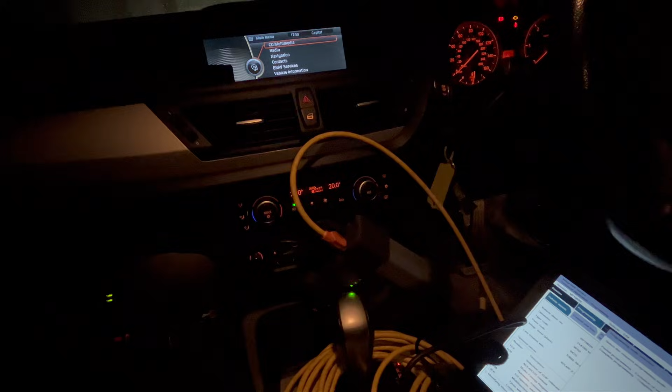So we're using ISTA/P Genuine to do a full update. I'll get everything connected up and show you the connections, and we'll go from there. It's quite late and quite dark, so I'll go through this very quickly.

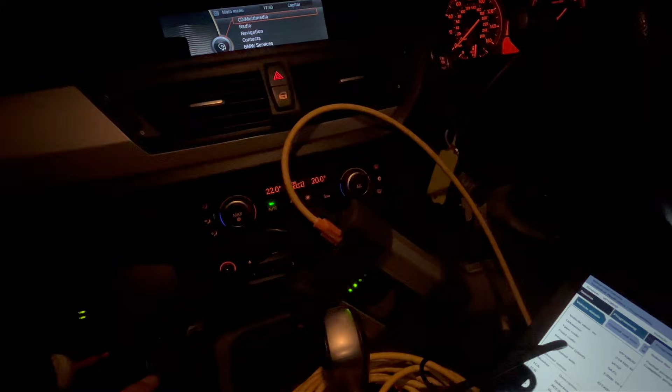Got the genuine ICOM connected, obviously, to the OBD port. Now on these E series cars, you have to also be connected to the MOST port. So on this E84, it's very similar to the E90s or the 3 Series. The MOST port connector is just under the glove box on UK cars, and under the driver's seat on American cars, or left-hand drive cars.

But you can see here there's a little tab that you pull down and you can connect the ICOM B straight to it. Apologies, you probably can't see it because it's dark, but basically that's the connector on the floor. We unplug that and we plug our ICOM B in.

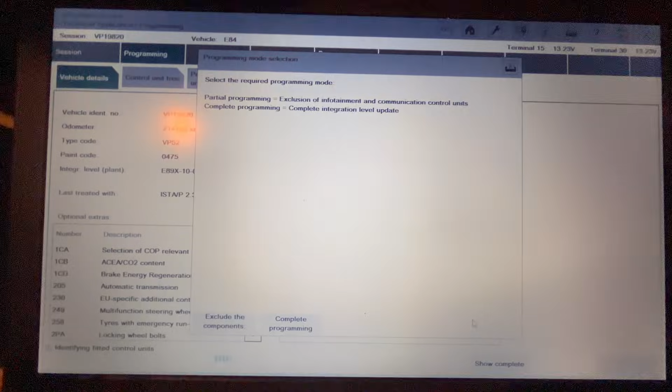Once ISTA/P is all loaded, it'll ask you basically what you want: partial programming, which is without the head unit side of things, or complete programming, which is everything basically. So the partial programming will just exclude all of the infotainment and communication control units, but what we're going to do is a complete integration level update. So we'll do complete programming.

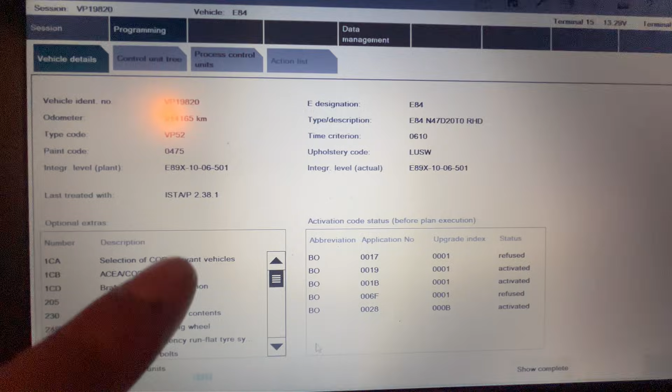All the vehicle information is here. It gives you the option codes and everything like that, all the activation codes that are on there, and also here is what we're looking at.

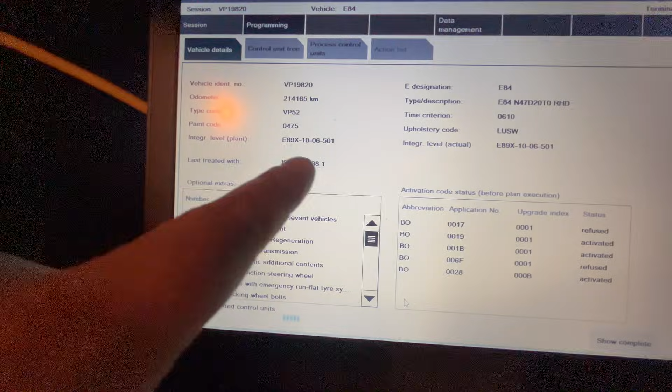So from plant, basically that means from factory, it was 10.06501. The actual one that is reading from the car is 10.06501. So this actually hasn't been updated since it came out of the factory. So there'll be a lot of updates to do on this. Engine, gearbox, head unit, climate control, every single module basically in the car will probably need an update at some point, or will need an update.

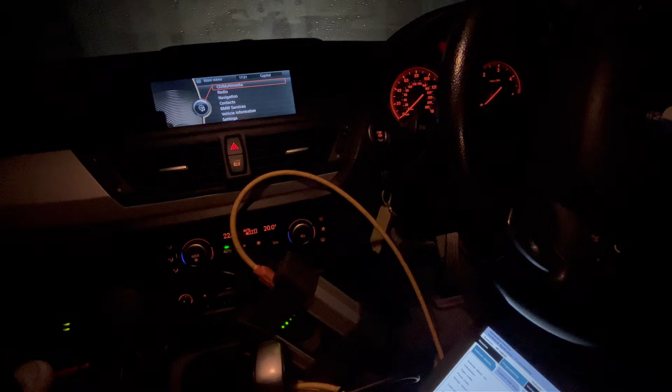So cluster, everything will be updated up to the current level, which it will show us, and I'll show you once it gets us to that. So it's just doing its bits, trying to determine what updates are needed. Once that's done, we'll get back onto it and show you what is happening.

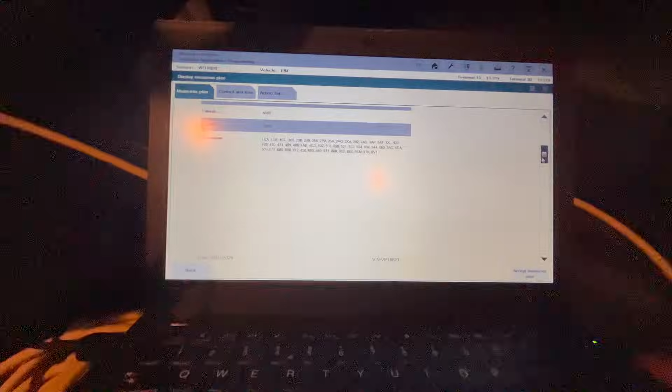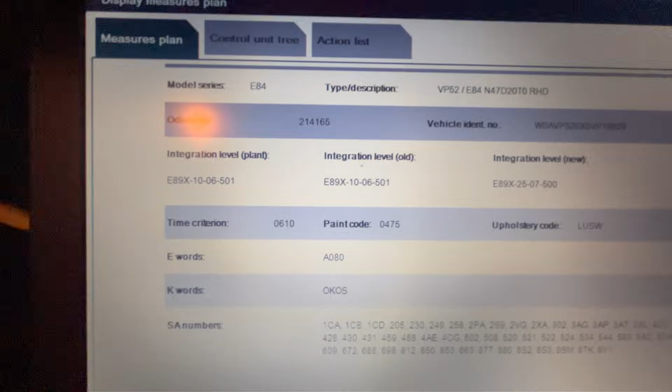So what it's done here is it's created the measures plan. It tells us all the vehicle information there. You can see integration level old will be 10.06501, which is what it currently is, and then it's going to be the new one, 25.07500. So a big update, and the programs, or units it's going to actually program.

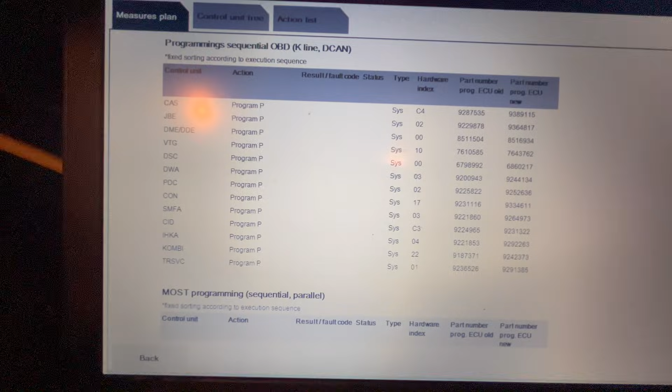So on the normal OBD K-line DCAN, it's all of them: CAS, JBE, DME, VTG, DSC, so everything there. And then on the MOST system, it's basically the head unit and stuff like that.

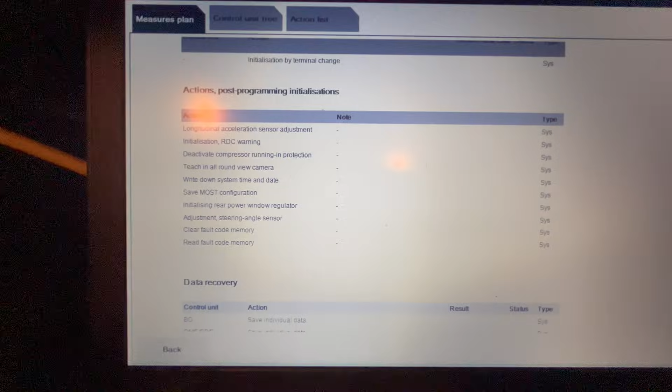Then afterwards, it will code everything in as it should be, and it will do some post-programming initializations: clearing fault codes, saving MOST configuration, teaching in all the cameras and stuff like that.

So all we're going to do is accept the measures plan. Click accept on there. So what this is going to do is calculate a time and go through everything and get it done.

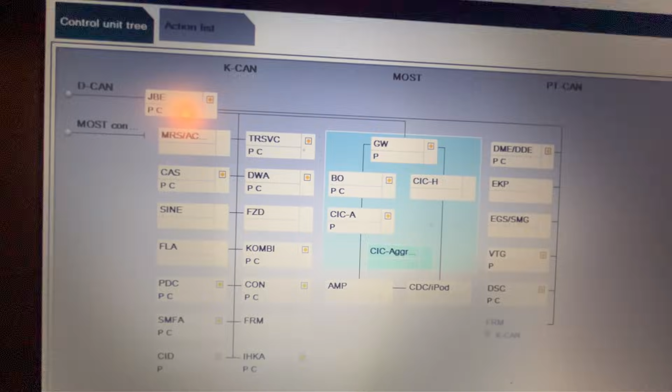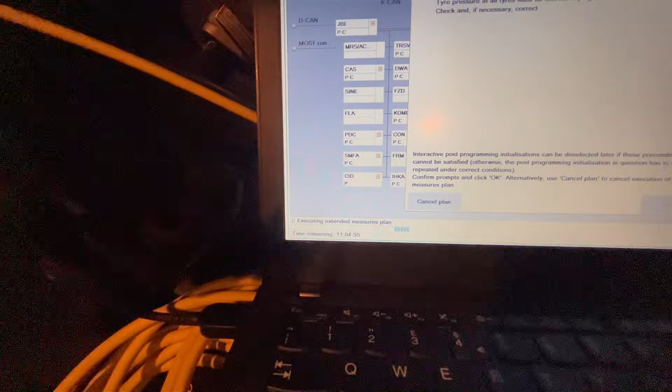So you can see that is doing what it needs to do on there. This will go off, it'll start making some funny noises and stuff, and hopefully we don't brick it. But yeah, estimated time remaining tells you on there, 11 hours and 4 minutes. So that is going to be great. We'll let you know when it starts. That time will more than likely go down once it starts, but we'll let you know.

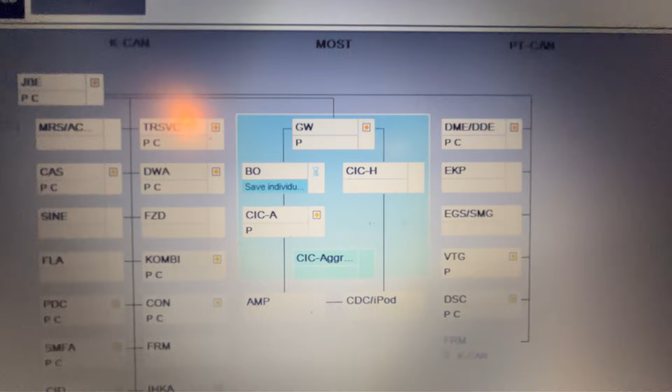So it's already started doing some weird things. That's gone off, the seat and everything started to move. It's executing the measures plan. I think it's going to start off with the head unit side of things, or the MOST side of things, so we'll see where it goes. This just shows the tree itself as to how it's all occurring, but we can go down to the action list and it'll tell us the progress and any notes if there are any problems and stuff.

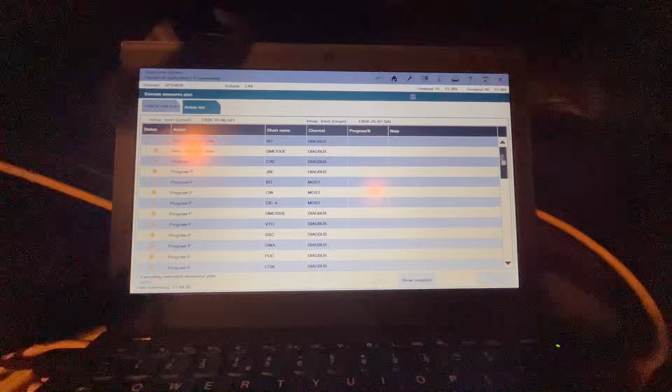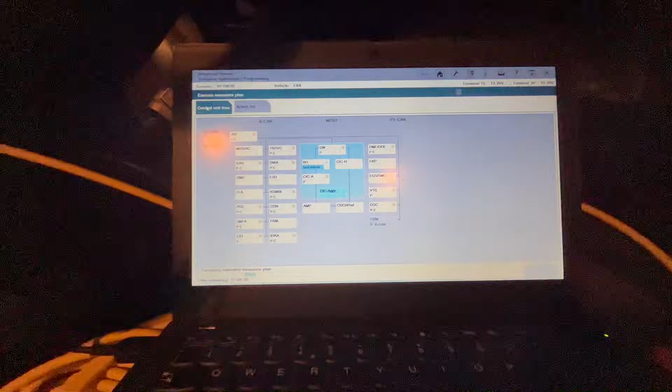So basically we'll just be following this out and seeing what actually happens. Stand by. Once it starts, once I've got an updated time at the bottom, we'll go from there. But I think for now it's just saving a few things, taking backups of things and stuff like that. So yeah, we'll be back.

Also, what I forgot to quickly mention was there's a big charger on the front maintaining the voltage, just at about 13 volts. Obviously the charger's connected to the laptop too, because we don't want that to die. So nothing should turn off whilst this is doing what it's doing.

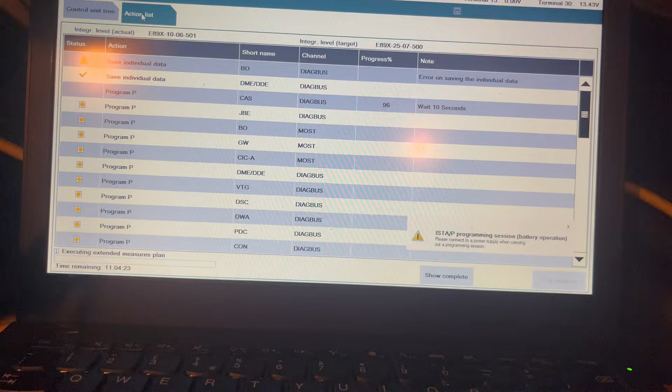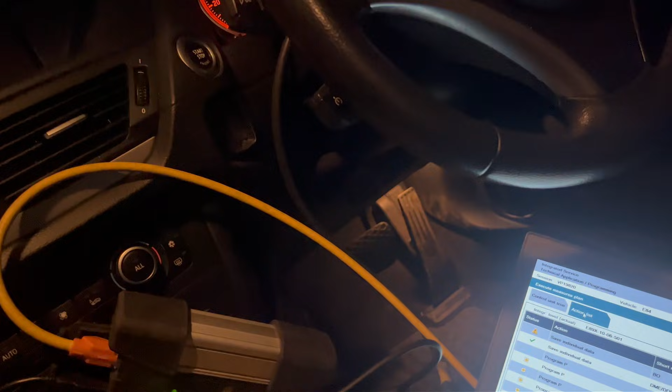So it has started, and we're going through with the bit on there. It's not able to save the individual data on the head unit, but not too bothered about that - it's just programming everything out. Part of this gave some instructions to turn off the ignition and take out the key, which is what we have done. So we've got the key just here.

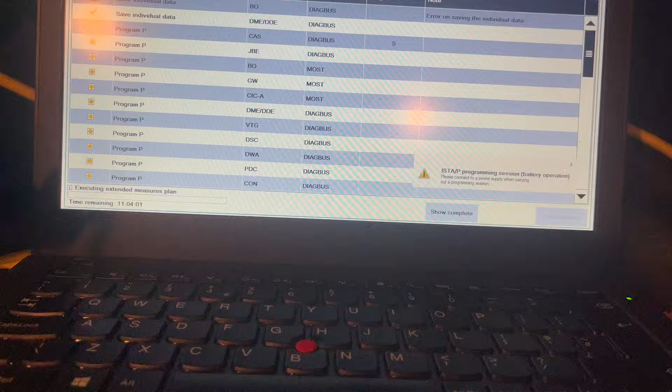So we're going to let this do its thing. We're still on 11 hours, which is nice, but it's progressing through. You can see there, percentage wise, it's going through what it needs to, and the same on the tree there - you can see the CAS just at the top there running through.

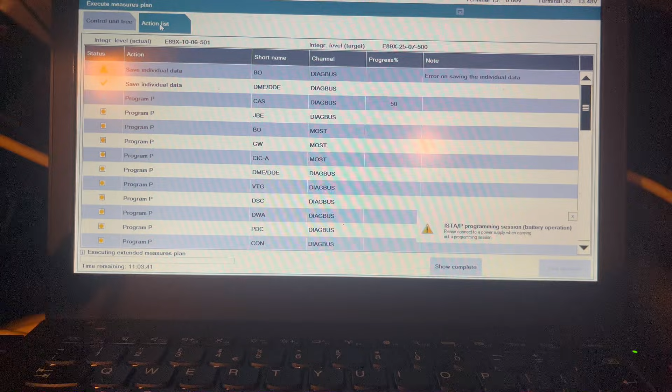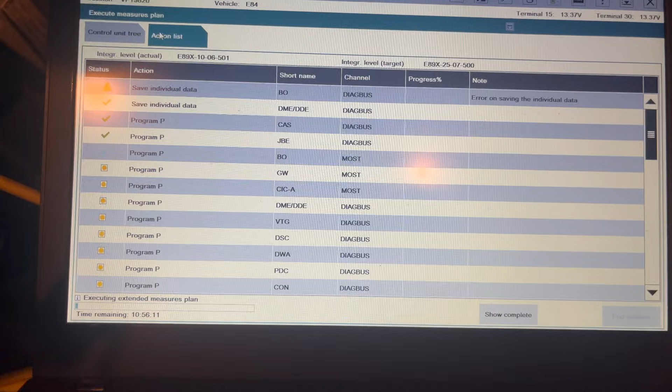Let this do its thing - I hope it doesn't take 11 hours because I ain't got 11 hours, but we'll see. I'll update you. We're a few modules done, it's just doing the MOST now. So you can see in the order it's going - it's done those ones, and now it's on the MOST side of it. So it should do all of the head unit now.

You can hear the fan operating now very loudly, so it's gone into its boot mode. We may see some writing on the screen saying it's gone into boot mode in a minute, but we're just going to let that happen.

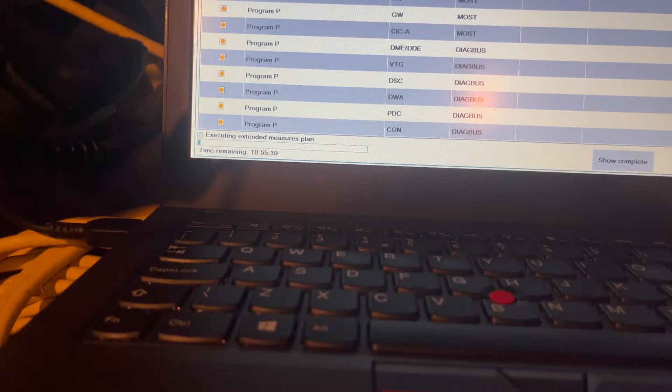It is still showing 10 hours 55, which at the moment it is 6 o'clock in the evening, which means it's going to take us to stupid o'clock in the morning, allegedly, to do. But yeah, we'll see - it should go down.

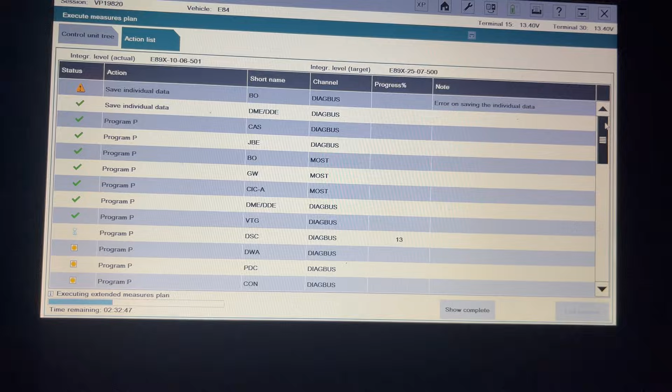But we'll see, I'll let you know when that starts up and does what it needs to. So we're back now - we are about halfway through the programming, and the time has dropped to 2 hours 32, which is better than the 10-11 hours that we were on.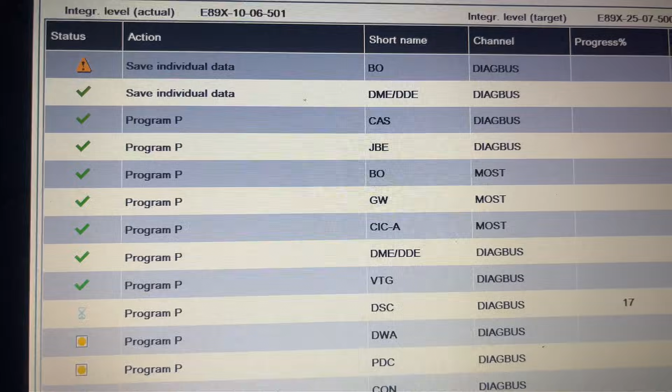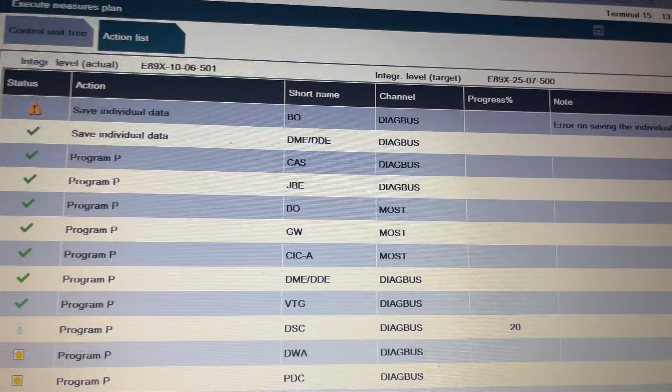So it's gone past, as you can see, the CIC - so the BO, GW, CIC-A, they were the MOST ones. After that, the programming went down. So now it's just doing the last of the programming for those few modules that say programming next to them, and then it will be on to the coding, which shouldn't take too long, and then just all the adjustments there at the bottom.

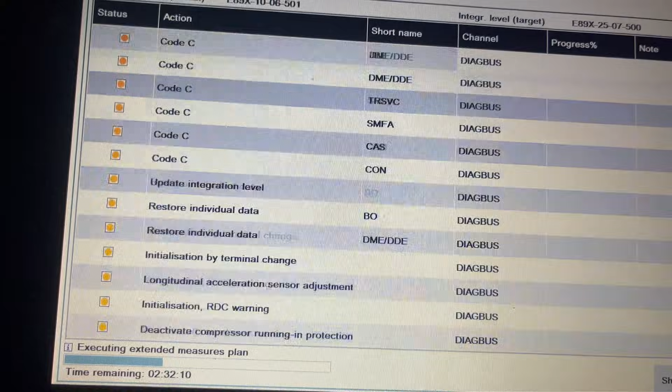So yeah, we'll probably get back to it once it's done all of that, and hopefully we fix the issue with the head unit when that comes back on. Fingers crossed that works - if not, looks like we're getting a replacement head unit.

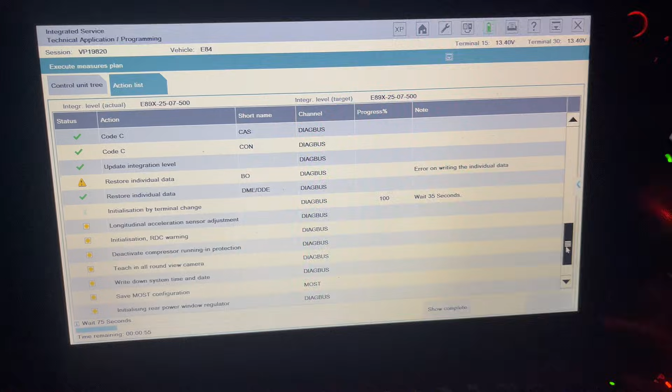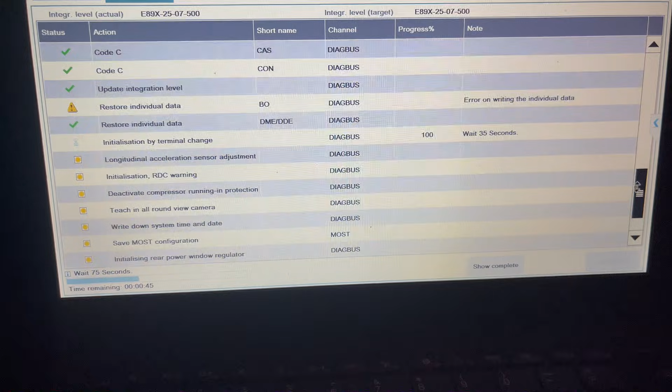So the main bit of the programming and coding has been done, and I'm happy to say it didn't take 11 or 12 hours. We're just going through the last bits now of the adjustments and stuff. I think all in all we started at about 6 o'clock - it's 8:30 now, so 2.5 hours.

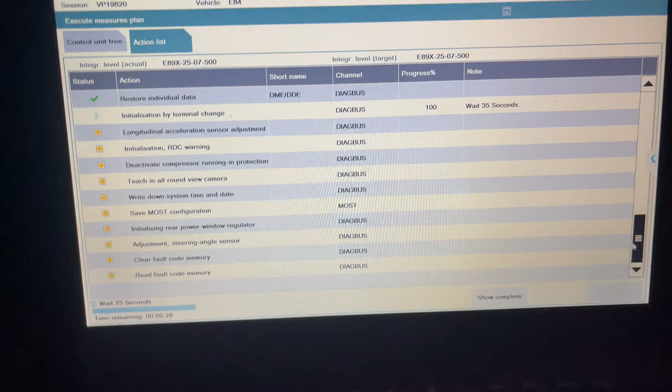This next part shouldn't take too long - it's just going to run through these last little bits. Should only take about 10 minutes or thereabouts, so we'll see if that has fixed our issue with our head unit.

Which it has stayed on, to be fair, since all the programming and coding has been done. So hopefully we'll take it for a test drive and see what's happening, but we'll wait till this is done first and we'll go from there.

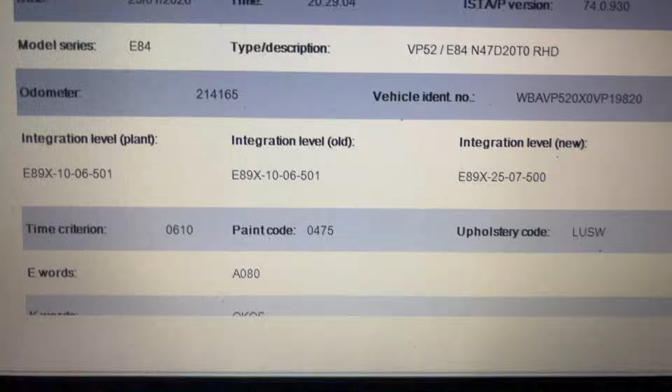So final report for this - all sorted. It tells you on there the old iLevel, what it was from factory, and then the new one is now updated to 25.07.500. Duration of the plan was 2 hours 32, so not too bad, better than the 12 hours it was quoting originally.

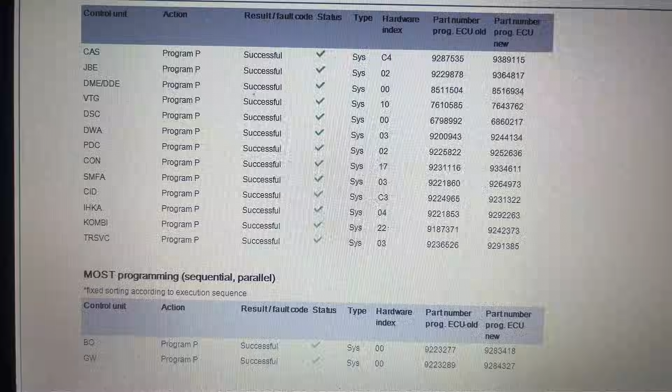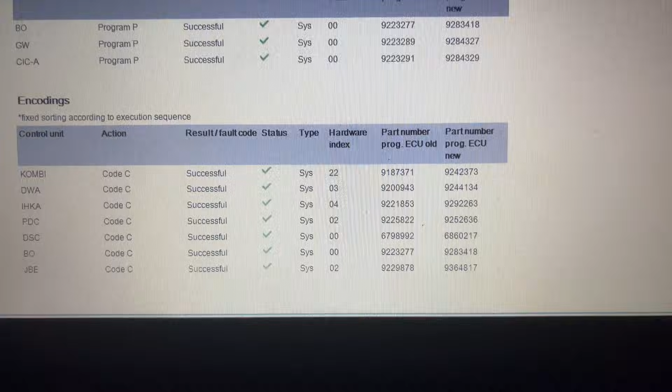So as you can see on here, programming sequence, everything done on the main DCAN and K line. It tells you what the old software was and what the new one is. Also the programming of the MOST system, which was all correct, and all the encodings etc were all successful.

And also the head unit has not switched off as of yet, so it's been on - I think that's fixed the problem. So all in all, I think a job well done.